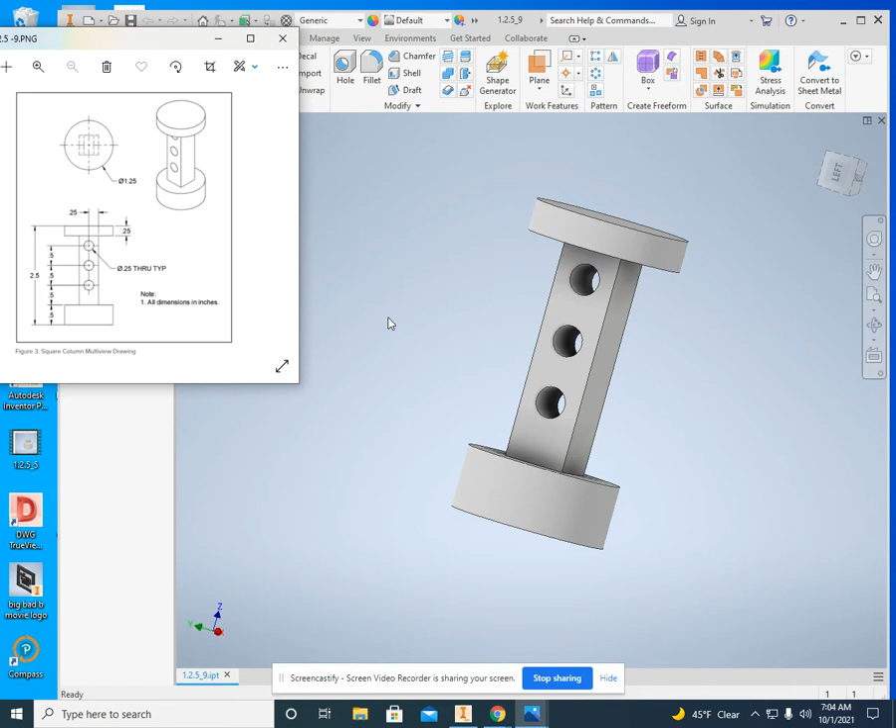So strap in and sit comfortably for your train ride into Knowledge Town. Woo-woo! That was my train.

Okay, file, new, part right there. I always like to get started from the bottom working up, that's just a habit I have. If we look at this, the multi-view is saying it's 1.25 in diameter, and the first circle is 0.5 up. So start my 2D sketch.

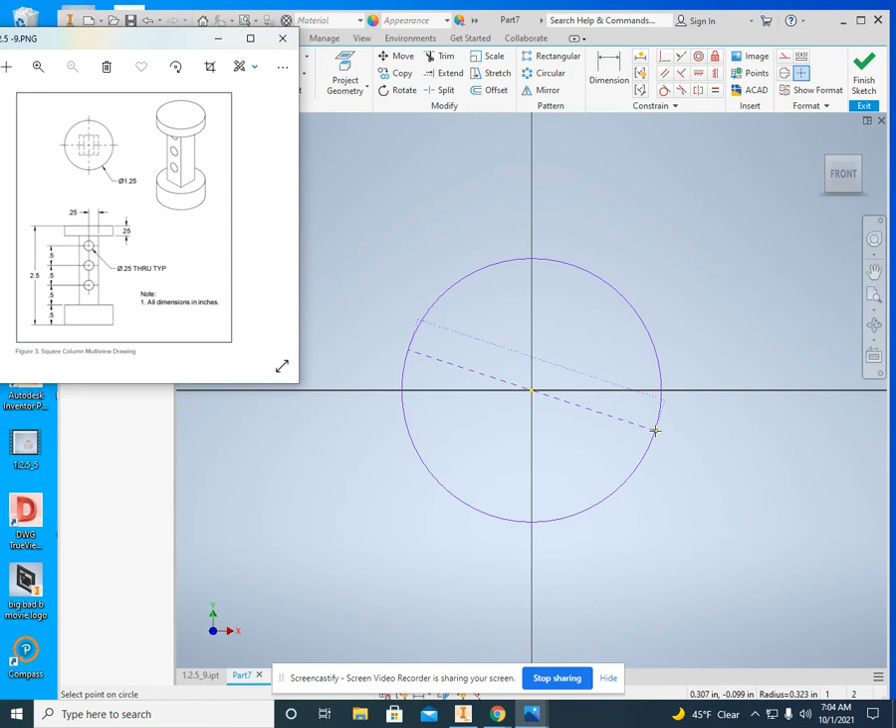Use my circle tool, and double check, 1.25 in diameter. Click on it, then dimension 1.25. Finish the sketch, and extrude this to 0.5. That gives me my first circle, 1.25 in diameter and 0.5 thick.

Now next, we have this square column. If we look at this square column, let's see, if we see this dimension, 0.25 from the center to the edge, that means it's 0.5 across.

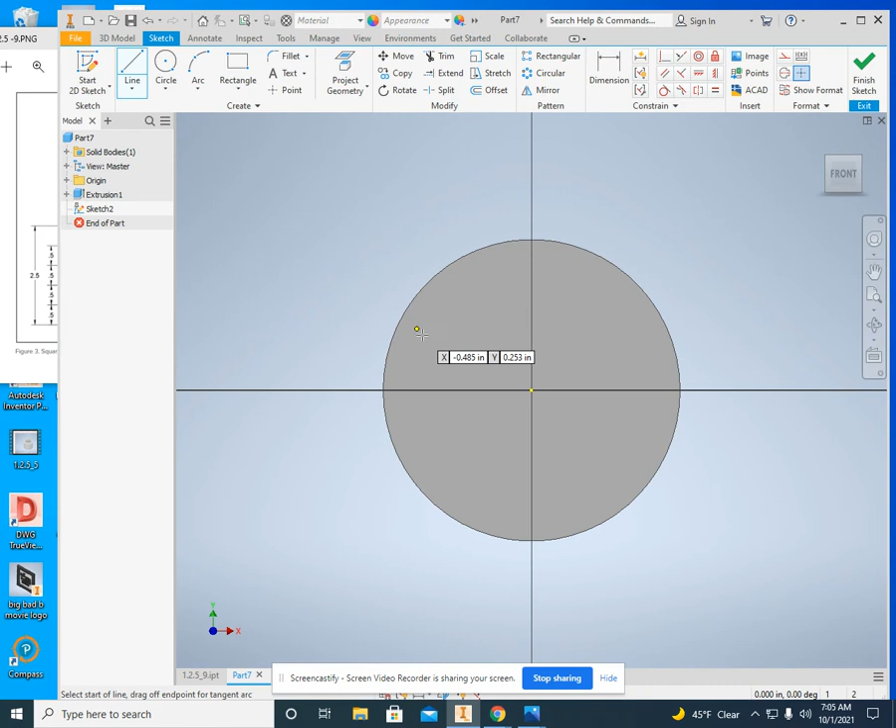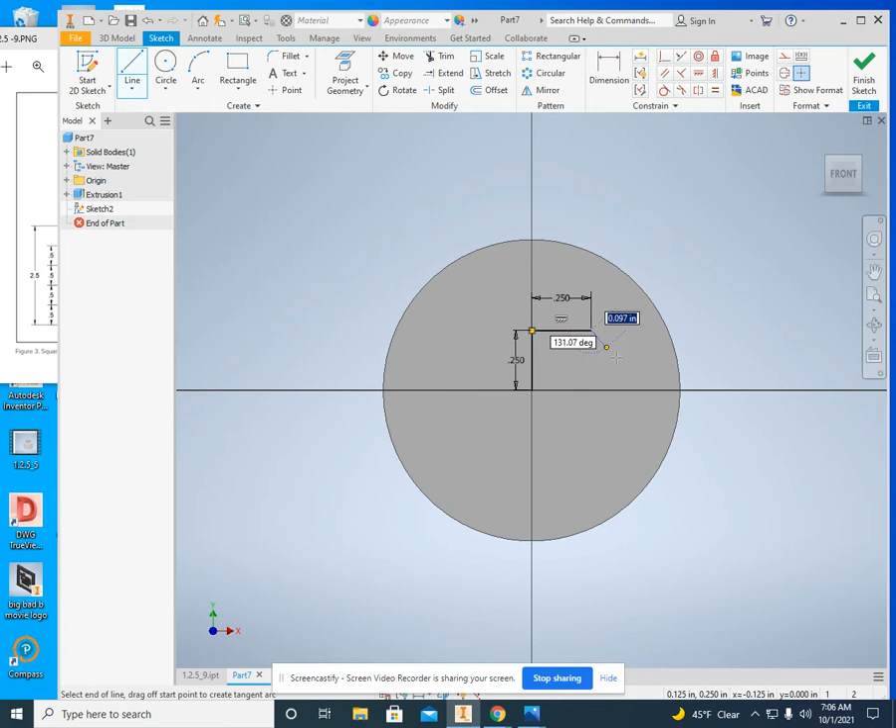So start 2D sketch, and I'm going to do my little handy dandy trick. Click on line, then go straight up and enter 0.25, then 0.25. Create a line, 0.25 that direction. Then go straight down 0.5, come to the left 0.5, go straight up 0.5, and then just to the right, see how it goes green right there? Close it. So we have our 0.5 square in the middle.

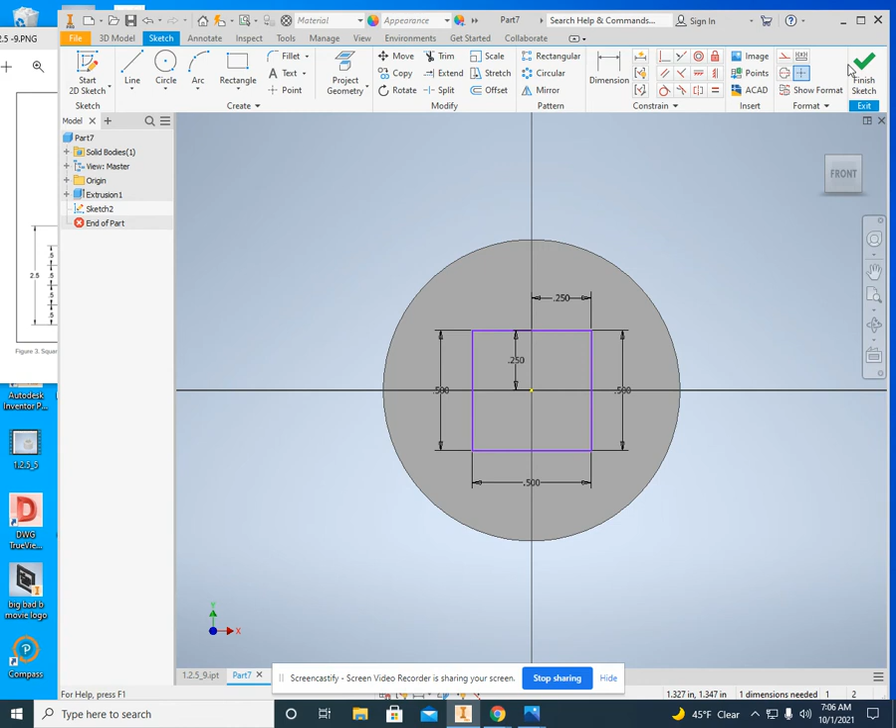Now I've got this little line right in the middle. Right click, delete, and we've got our square. So I'm going to finish the sketch right there.

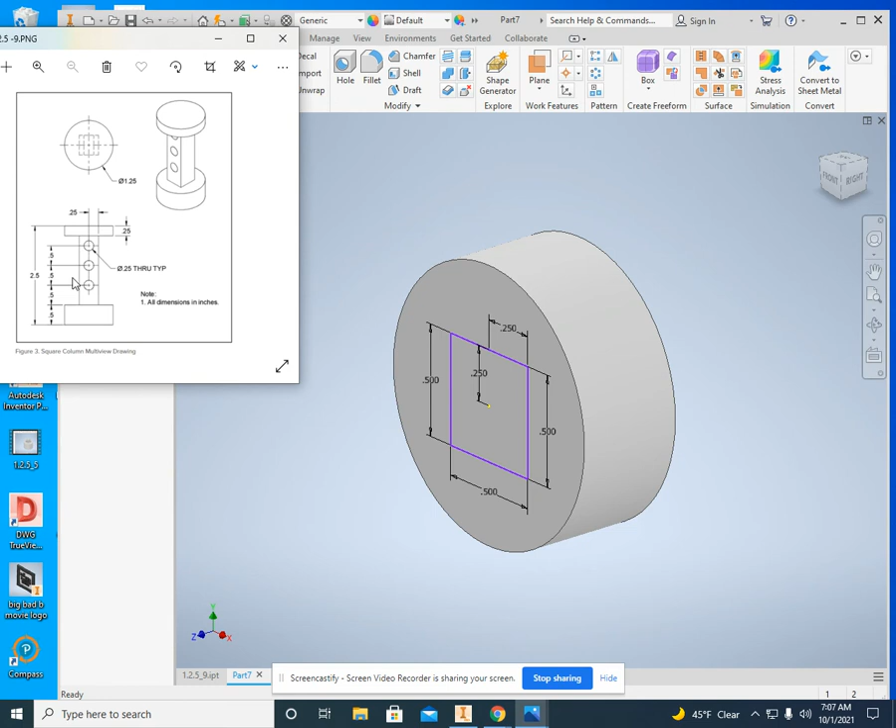So we've got no direct length telling us how long this is, so we're going to have to use math. We can see that this is 2.5 total, this is 0.25, and this is 0.5. So 2.5 minus 0.5 is 2, minus 0.25 is 1.75. Let's check the math again: 2.5 minus 0.5 is 2, minus 0.25 is 1.75. So that is what we are going to extrude.

Extrude right here, distance A is 1.75. 1.75, enter. There we go.

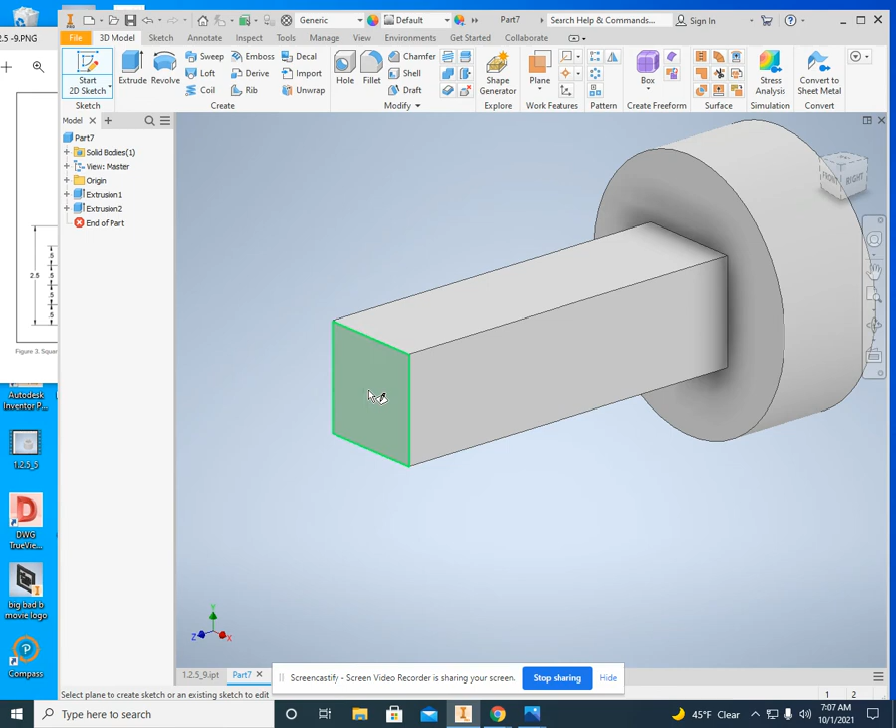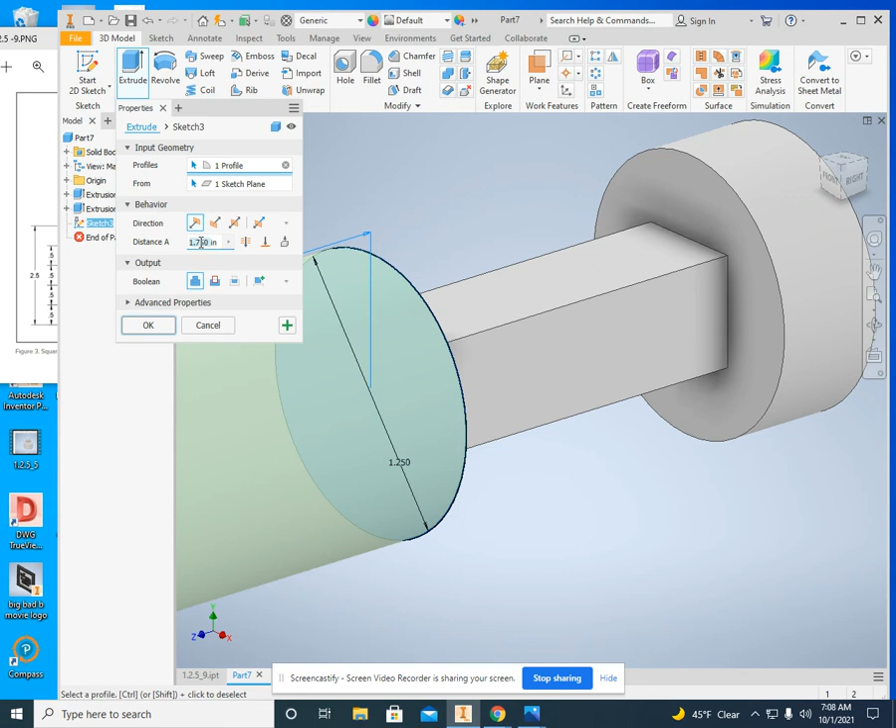Now we've got to put our circle on the other end. The circle is 1.25 in diameter, and it's 0.25 thick. So start 2D sketch, click circle right on the origin, enter 1.25, finish the sketch. You can see it's just a ghost image hovering right there. It's 0.25 thick, so extrude, distance A 0.25, and okay. So there we go, this looks like a barbell or something like that.

Now we've got to put our holes in there. Now you're going to make a mistake initially and think that holes are circles. Holes are not circles, they are something completely and totally different. So let me show you how to do this.

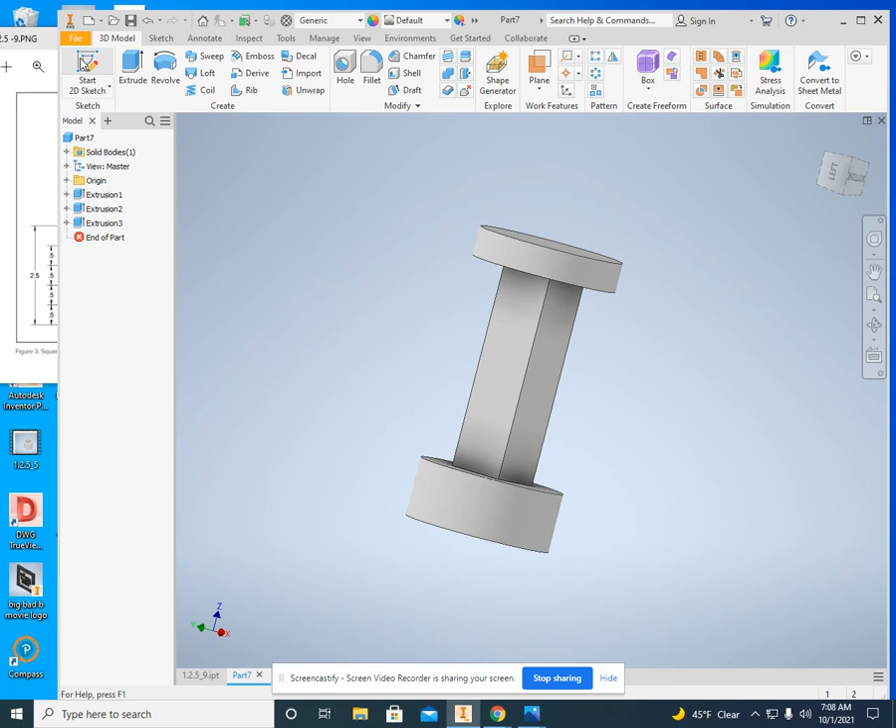We are going to start 2D sketch, click on the face right there. Now I'm going to go to point. Using the point, I'm going to go left and right. Now you see that little dotted line that appears right there? I'm going slowly left and right. There's a dotted line, that is sort of a coincident constraint. It's telling you that's in the middle of that piece. We're going to talk more about constraints on later projects, but for right now, that is there.

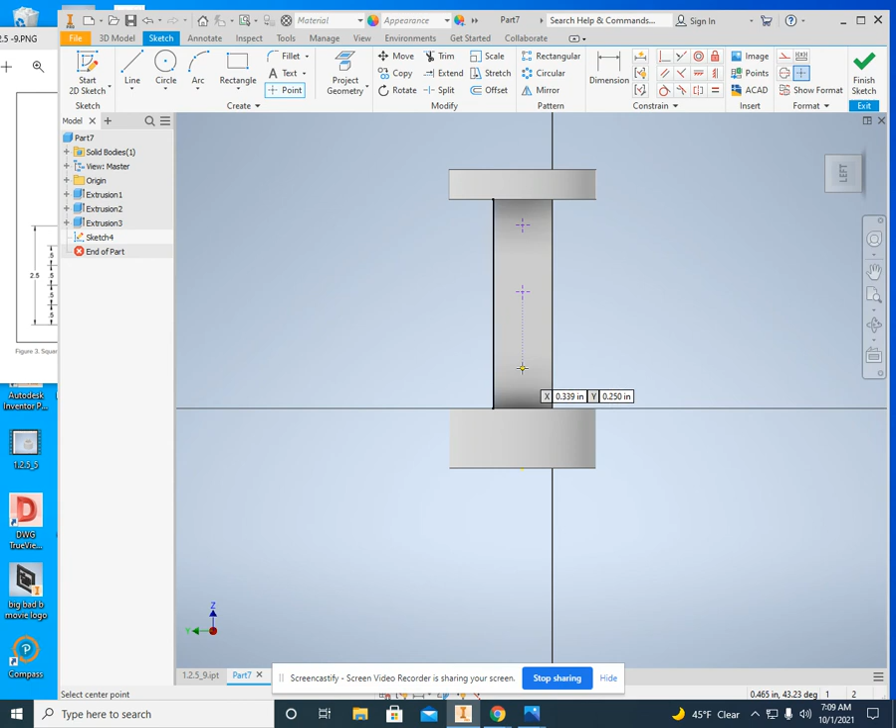So what I'm going to do is put a point there, come roughly in the middle. See that, it's in the middle again, and then roughly in the middle again. So I've got 3 points installed.

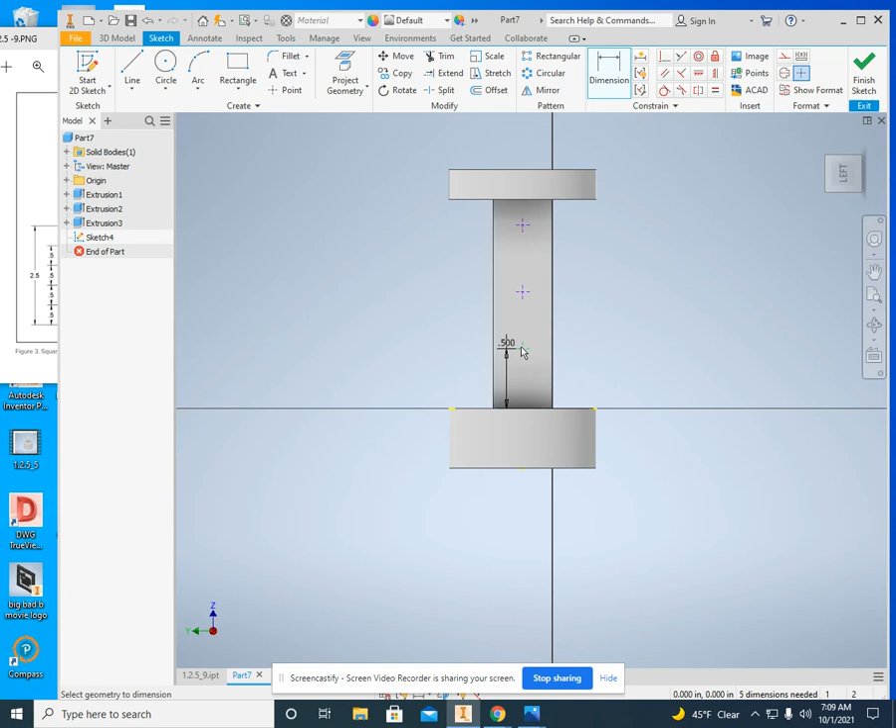If we look at this, they are 0.5 from the bottom, so 0.5, 0.5, 0.5. Starting at the bottom, use my dimension tool, click on the bottom to this point, and change it to 0.5. This one to this one, 0.5. This one to this one, 0.5. And there we go, we have 3 points installed.

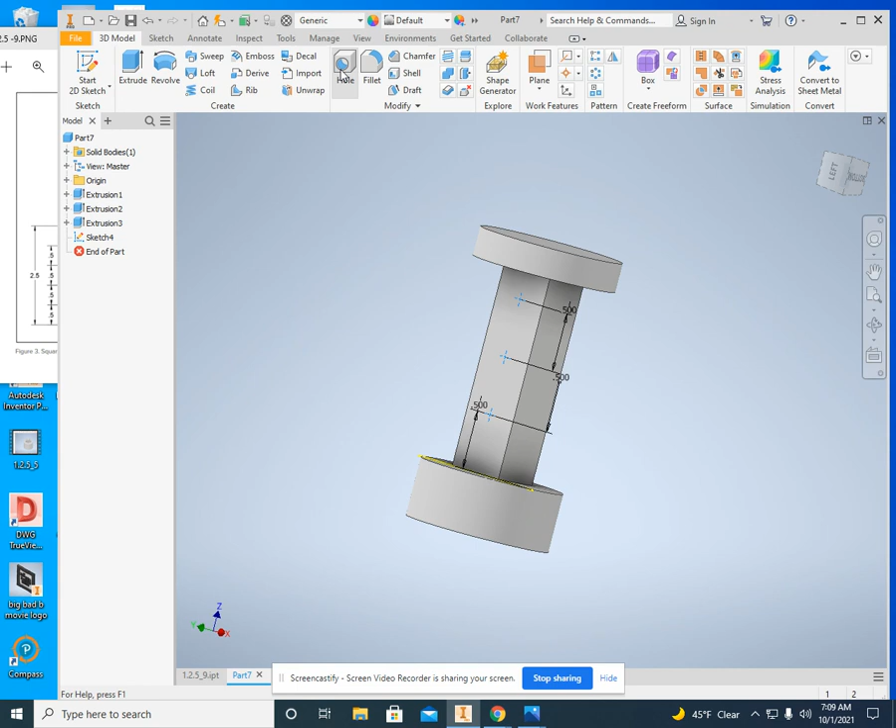Now you might say, points are not circles or holes or something like that. I know. Finish the sketch. Now check this out, the hole tool. Click on hole and look at that, it automatically puts in holes.

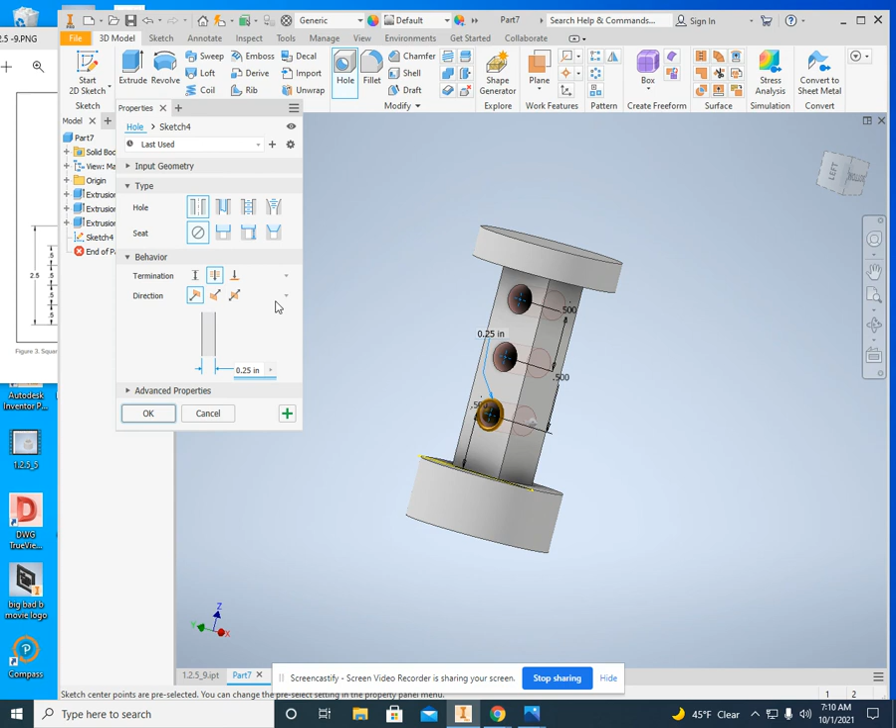When we look at this, they are 0.25 through holes. So what we need to do is termination through all, okay? And they are 0.25 in diameter, so it comes up automatically that this is what we want. Again, through, and you can look, there's distance, like if we were only going halfway through. There's different things right here, but right now, through all, 0.25. Click on OK, and that, my friends, is how you make that particular shape.

So it's kind of a simple, easy shape, introduces you to a few new ways of doing things, a few new methods. Go ahead and stop this video, rewind, and replay as many times as you need in order to get the concept.